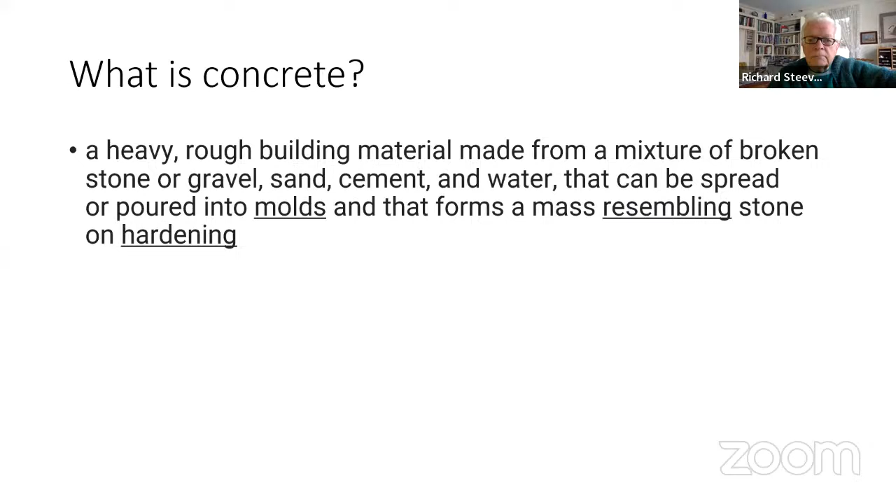So compared to concrete, cement is the binder. It's the chemical substance used for construction that sets, hardens, and adheres to other materials to bind them together. It is sort of a glue. And I know for myself, I always in the past used them synonymously, and they're really not. The aggregate that goes into concrete can be pea gravel, or it could be stones or broken up material. So let's differentiate between cement and concrete, and I think you'll see why here in a little bit.

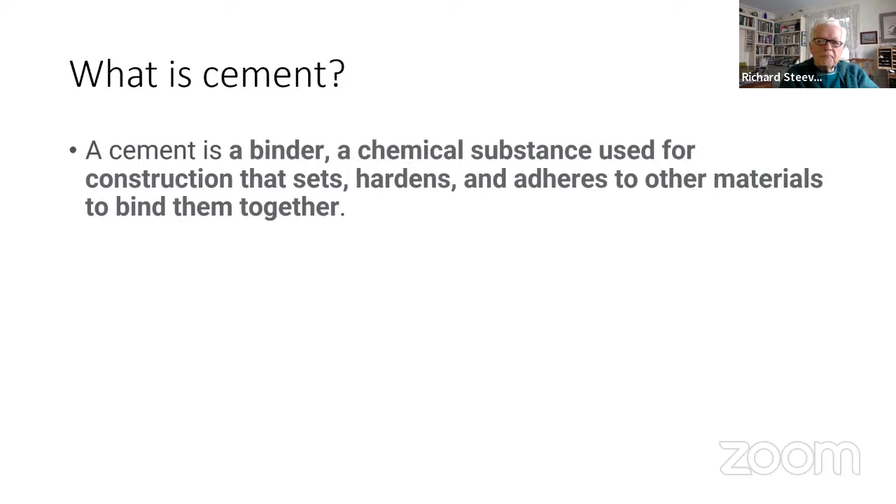So this is, hold on a second. So this is the chemistry behind cement and concrete, and this is in part what Richard's getting to, that to make cement, and in particular Portland cement, you take limestone, which is calcium carbonate, CaCO3, and you heat it up in a kiln. It drives off the CO2, the carbon dioxide, and leaves you with lime, which is simply calcium oxide.

And then you combine that lime with silicon dioxide, which is sand, and you get several different varieties of this calcium silicate, or calcium oxide silicate compound. And it turns out that the three-member version of that develops most of the strength in cement and concrete itself. There's also alumina, that third one down, this one right here.

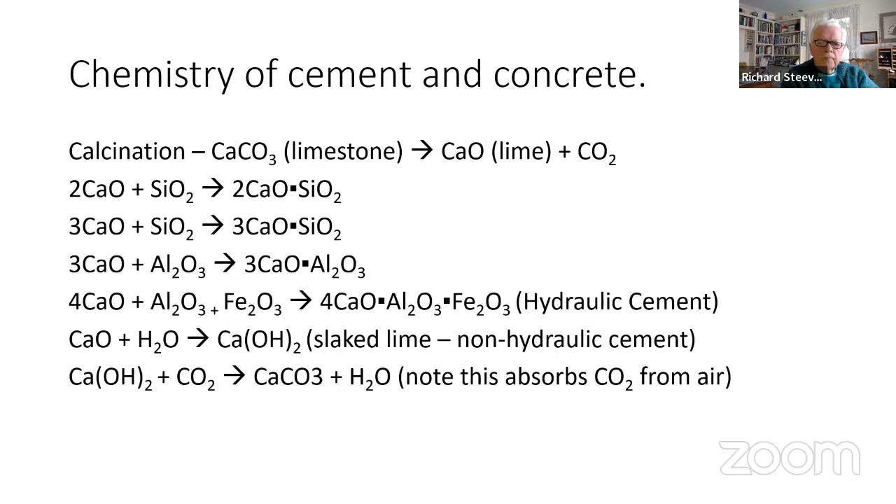Quick question, if I could, Doug. Does Portland cement include mixtures of the top three in your previous slide? Or does it also include slaked lime? Yeah, so I'm going to get into that right here. That's a great question. Okay. Good.

So it turns out, and you can see it here, this is Portland cement composition. And you see in the mass concentrations that they vary quite a bit as to how much of each of these components end up comprising the ultimate cement that you use. And I'll get into this in more detail a little bit later, but this variation is a result of a long period of time in the development of cement itself and how to concoct different recipes that end up with different properties.

So the cement, for example, that's used in a nuclear reactor shell would be different than the cement that you would use to pour a sidewalk. The requirements, probably the testing as well, of the two are quite different. And yet again different is something that you would line a chimney with. To line a chimney, you put a lot of alumina in there. You end up with a Portland cement that is very resistant to temperature, but it's prone to sulfur attack, for example.

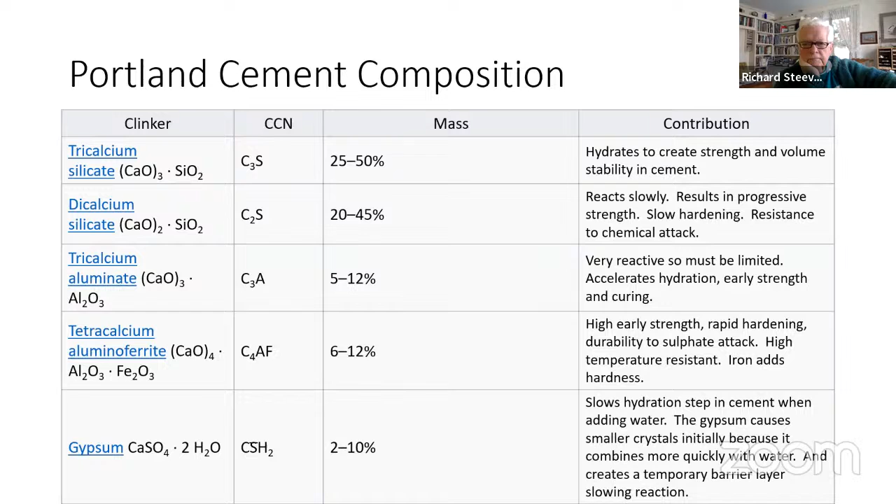And obviously that's an important consideration, depending again on what you're building. So again, here's a typical concentration profile of Portland cement.

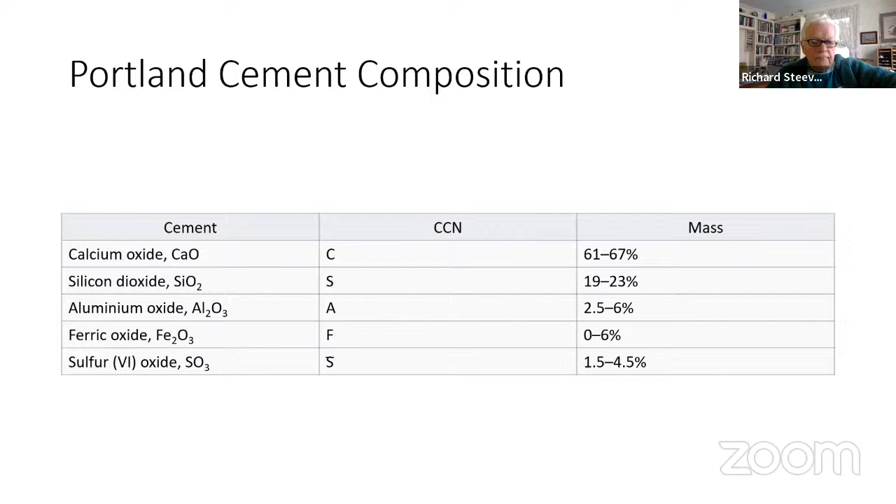And I'm gonna go through this in a little bit of detail because I personally found it interesting. So this is the chemistry that occurs when you add water to cement. This tricalcium aluminate first reacts with the gypsum. Remember, the gypsum has sulfate in it. I think everybody knows that gypsum is what you make wallboard out of, or sheetrock. It's in sheetrock.

With this water, it produces this compound that's called ettringite, and it also releases quite a bit of heat. It's this formation of ettringite that slows down the ultimate reactions that result in the hardening of the cement and the reaction with the aggregate that's in the concrete. The ettringite consists of long crystals that are really only stable in a solution with gypsum. So it's not stable without the gypsum, and it ultimately doesn't contribute to any of the strength in the cement glue. But it's important to slow things down initially.

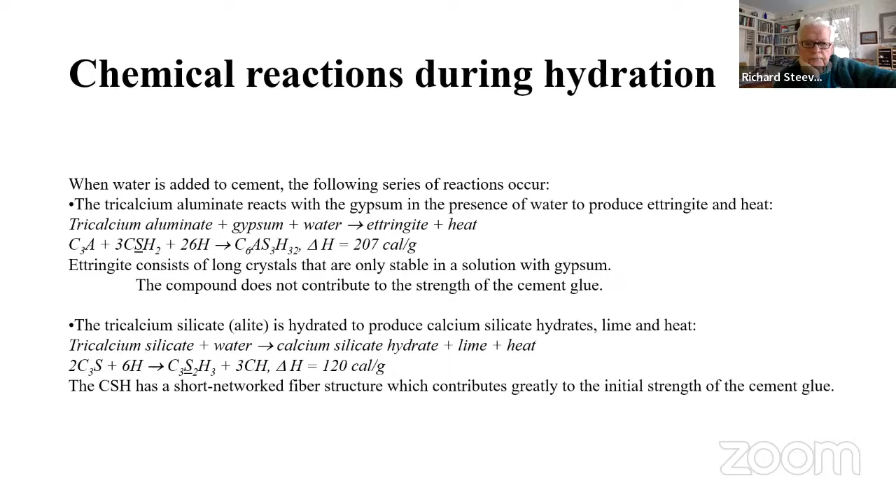Once all the gypsum is used up, the ettringite that was formed becomes unstable, and it reacts with any remaining tricalcium aluminate to form this monosulfate. Because this is unstable, it can create voids in the cement and in the concrete. Those voids then allow water to come in and a different crystal structure to appear and to grow. And these bigger crystals can result in cracking of the concrete.

It's sort of interesting. I'm not a civil engineer by training, but one of my brothers was a civil engineer, and I remember him telling me once that all concrete cracks eventually. If you've ever had a concrete driveway or concrete in your garage or on your basement floor, you're always disappointed when you start seeing cracks. You think they didn't pour it right. But this exposure to water and this change in crystal structure can result in these cracks. And that obviously weakens the concrete.

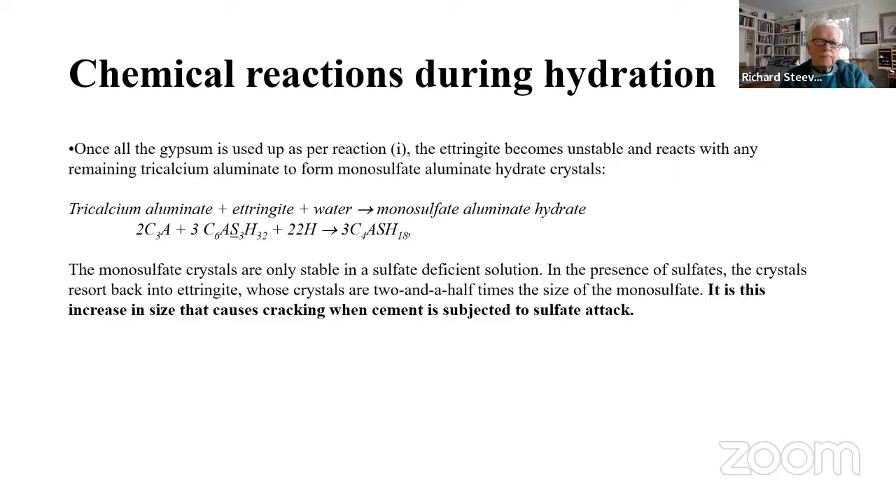And we'll get into this a little bit, it'll expose any structural steel embedded in that concrete to the elements, which can result in corrosion and weakening of a structure. So clearly when you're using this to build tall buildings, you have to be sensitive to that. Especially if you're in Turkey. Especially, really anywhere in the world, yes, including here in the US, right? Sure.

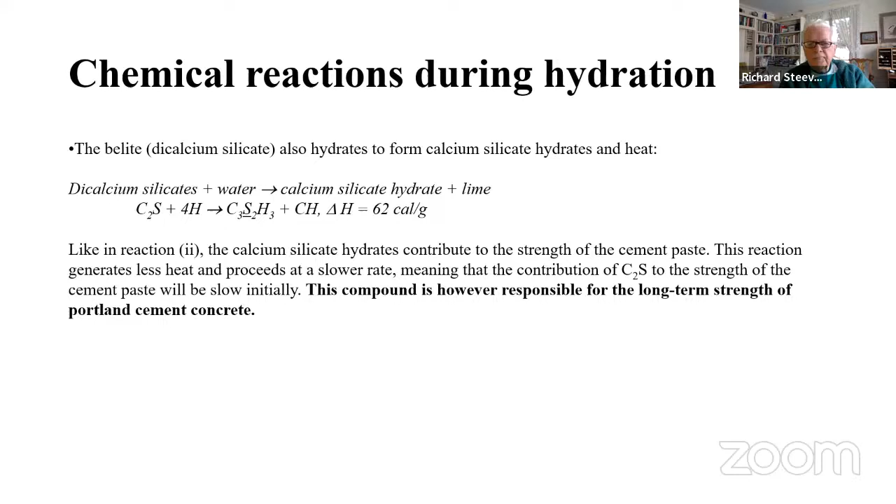So this dicalcium silicate also hydrates to form a calcium silicate hydrate and more heat. And it contributes to the strength of the cement paste. It's interesting, I copied this out of documents online, and cement is always called a paste. I've never thought about it in those terms before, but that's one of the things I learned from this dive into concrete. This reaction proceeds at a slower rate, so it develops its strength more slowly, but the compound is responsible for long-term strength of the Portland cement concrete, by slowly curing over time.

Could I ask a question? Sure. Concrete, as I understand it, is very strong under compressive stress and very weak under tensile stress. Correct. Is that also involved in the choice of cement? I think, Don, I'll say that no cement is terribly strong in tensile stress, and to gain that additional strength, that's what you add the structural steel for, and it's also important that it be able to undergo some torsion, right?

Either twisting or bending, and buildings that have concrete in them do sway back and forth to some extent, so there are a lot of other compounds added to cement, including polymers, to improve the ability of the concrete to flex more, in spite of the fact that it doesn't like doing that. Again, I'm not an expert in all this. I know a lot more than I used to, but I've read a little bit about that as well, and you're right. Generally speaking, concrete is used to support things as opposed to hang things.

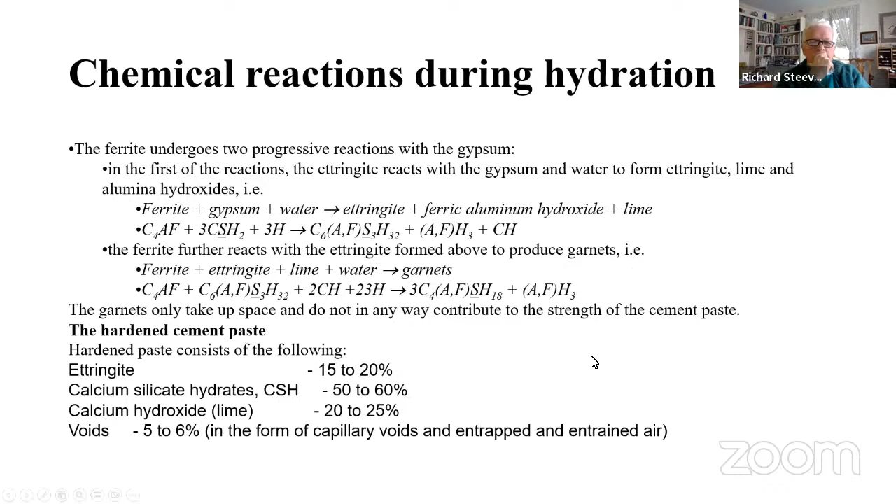Having said all this about the sort of underlying chemistry, this is really why concrete is desirable as a construction material. So concrete has a lot of properties that make it popular. And it's this correct proportion of ingredients, placement, and curing that are needed for the properties to be optimal.

Good quality concrete has many advantages. First, it's economical when the ingredients are readily available. Concrete's long life and relatively low maintenance requirements increase its economic benefits. Concrete's not as likely to rot, corrode, or decay as other building materials. It can do all of those things, but it's just better than some other building materials.

It has the ability to be molded or cast into almost any desired shape. I think that's something that after reading it, I have real appreciation for. And the building of the molds and casting can occur on the work site, which reduces costs. Obviously, you don't have to transport these things. Although we've seen certainly that in some cases, these precast concrete shapes are brought to the site. So there's obviously a trade-off there at times.

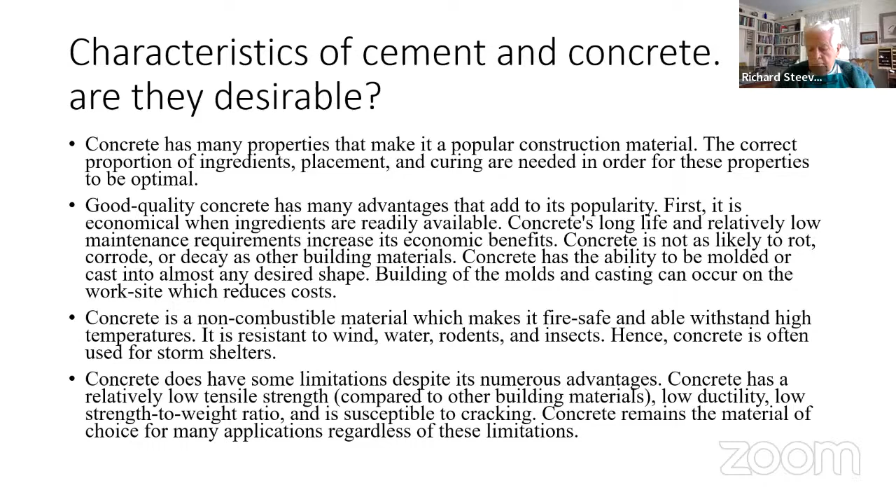So what's the impact? Well, before I go on to this, I just want to point out that one of the things that I learned about concrete is that as long as it's been around and as much as it's been studied, it really isn't as well understood as you would expect. And it turns out that the specification for concrete is not so much based on its ultimate properties, but it's based on a formulation.

So, for example, it's my understanding that if you were to actually specify concrete for, for example, a nuclear power plant shell, the specification for it is in terms of the components, the recipe for the concrete, and not necessarily a physical test that determines that the recipe resulted in the proper physical properties. And that's because it's so complicated.

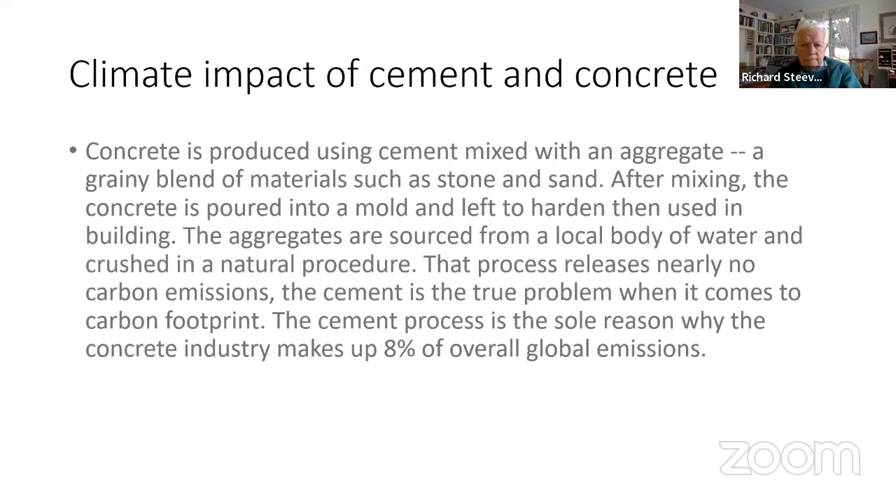And that process of producing the aggregate releases really almost no carbon emissions. Sure, there's probably some energy used in doing that, but for the most part, the cement itself is the true problem when it comes to carbon footprint. And the process of producing this Portland cement is for the most part the sole reason why the concrete industry makes up about 8% of overall global emissions of CO2. So this is a distribution of those emissions, and you can see here the concrete sits in this little piece of pie right here.

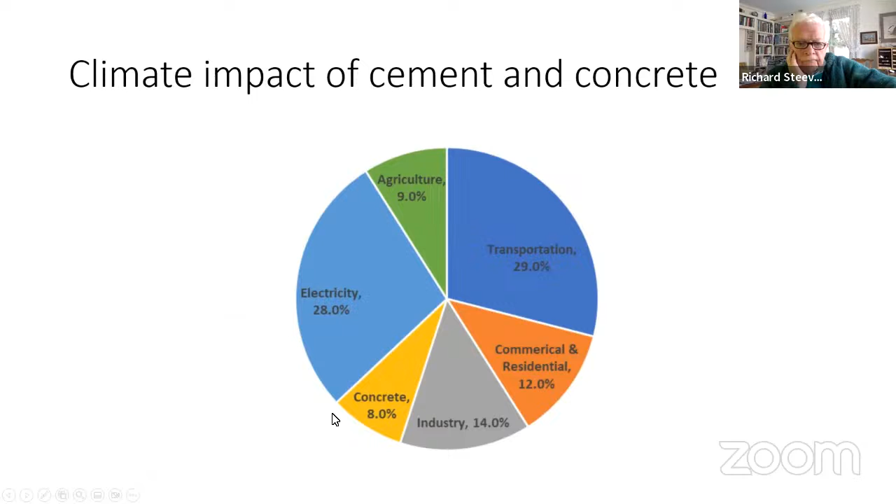So this talk is supposed to be about alternatives to cement, but I needed to learn about cement to begin with. And so I dragged you through that too. After all, I had to be dragged through it. It's only fair. Sure.

So there are alternative binders to Portland cement, and some of them are listed here. We're going to go through them in more detail here in a minute. One of the things that is added to cement often is fly ash. And we're going to talk about fly ash quite a bit here.

But fly ash is something, when you're burning coal, other than the carbon that's in the coal, there's a lot of other mineral material in that coal, and it ends up coming out the top of the stack or being precipitated out as fly ash. And there is an enormous amount of fly ash that makes up lagoons and just fields of it around the U.S. and really around the world.

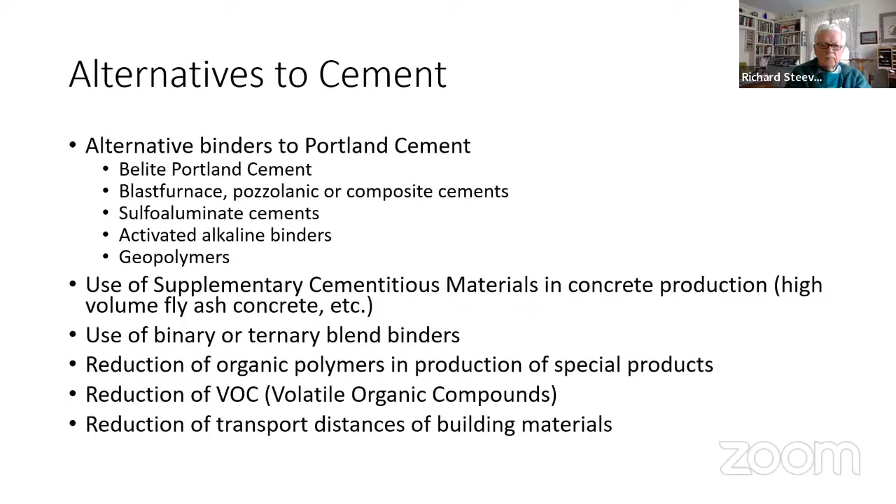Those are additional components in this cement that to some extent replace the Portland cement that we use in larger amounts. It turns out that cement's been used forever. And so I found this online that the Babylonians and Assyrians used asphalt to bind together burnt brick or alabaster slabs.

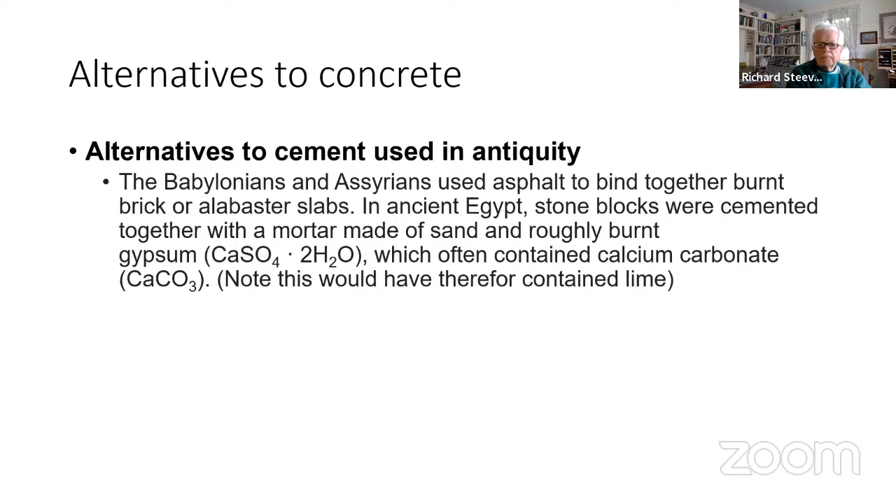And then in ancient Egypt, stone blocks were cemented together with a mortar made of sand and roughly burnt gypsum, which often contained calcium carbonate. And therefore, this would have contained lime. And this is actually a type of mortar that we sometimes use even today, to build a brick wall or a stone wall in particular, just to fill in the gaps between stones.

So sulfo-aluminate cements: you burn limestone, calcium carbonate, bauxite, which is what contains the aluminum, and gypsum at roughly 1300 degrees centigrade, and you get this 20 to 70% of tetracalcium trialuminate sulfate, and you use less limestone when you do this, and because of that, you produce a little bit less carbon dioxide.

You use more gypsum, which is that calcium sulfate, and you end up with something that is a little bit more porous. And when you produce this stuff in a kiln, you can imagine you're melting everything, and then it's sort of solidifying as you cool it.

And then to use it in producing concrete, it's necessary then to grind it. And so this material, I guess before it's ground, it's generally referred to as clinker. And so that clinker is then ground to a finer powder, and that's what typically we would buy in a bag, say at Menards or at Home Depot or a hardware store.

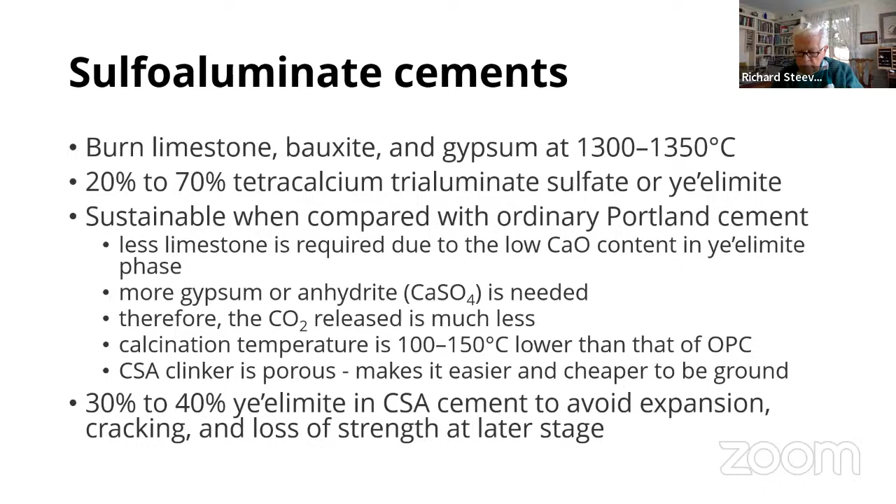One of the things that I had to get used to when I was reading articles on this was that the C normally refers to calcium as opposed to carbon, and because these are all hydrated crystal structures, you can imagine that the chemical formulas are really long, because there's a lot of water that goes into this crystal structure. And so what they do is to shorten everything to single letters, and so you have to get used to the abbreviations.

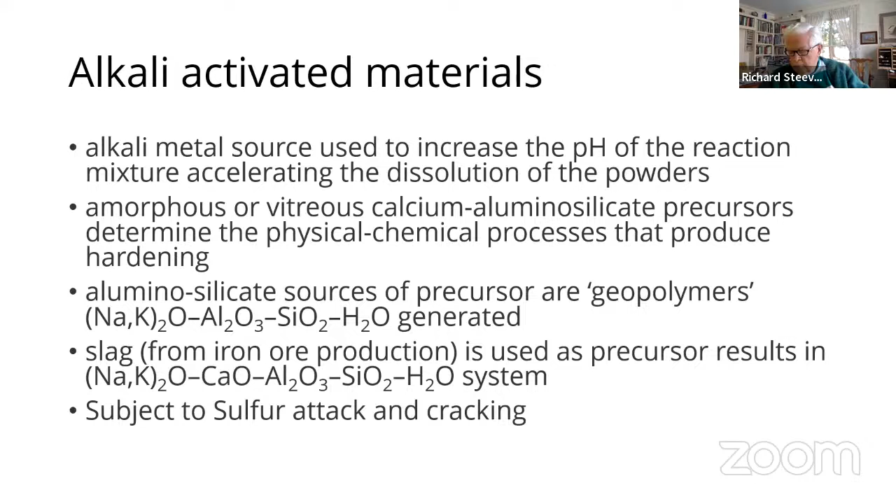And then in addition to fly ash, iron ore slag or iron slag from production of steel can be used. And likewise, silica fines can be used in this system. So all of these can be subject to sulfur attack. And the sulfur attack occurs when, remember that we have that gypsum in there that has sulfate in it. And if you get sulfur into the voids in the concrete or in the cement, then the crystal structure changes and those crystals get bigger, and that causes the cracking. So again, this formulation tries to avoid the voids from forming and prevent this conversion of these crystals to larger crystal structure.

The geopolymers are attractive because the natural and industrial silico-aluminate waste can be used as precursors. That's fly ash. That's slag from iron or from steel manufacturing. And the sediments in the reservoirs also contain a lot of alumina and silica, obviously. So these sediments are forming upstream of dams along rivers certainly in the U.S., but really around the world. You can imagine that the reservoir formed by this big dam in China is going to slowly but surely fill up with sediment, and it'll have to be dredged out. These materials are available from those sources.

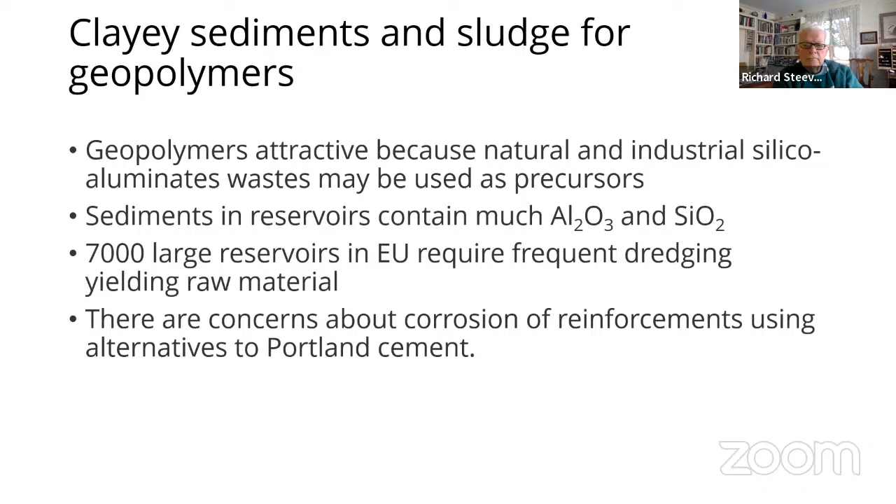And so again, this issue with these voids being created in the cement is a concern because they allow water to infiltrate concrete, and then that attacks the structural steel that is oftentimes included in the concrete itself.

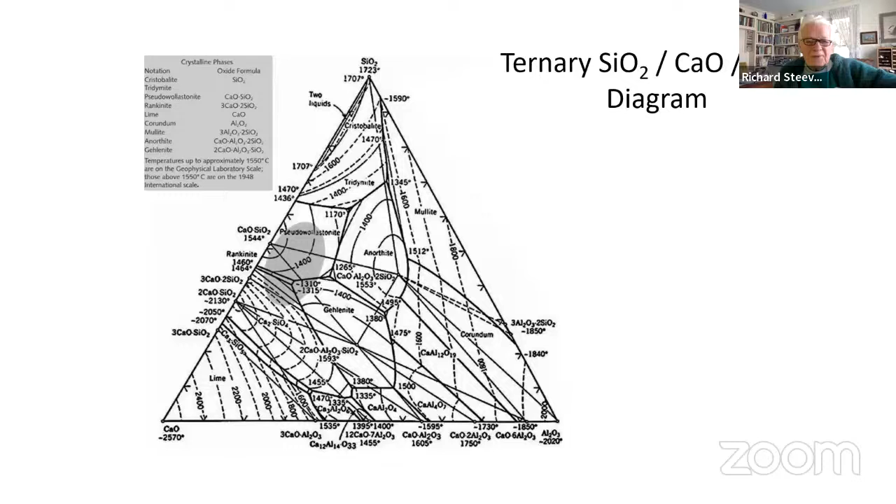So, what are some of the alternatives to this? That's really what this talk was supposed to be about. I'm going to go through a list of them here; I found a whole bunch of these things. So bamboo, as you see here in this picture, can be used as an alternative to putting in structural steel, for example. Bamboo, obviously, being pretty flexible. It's available locally in some parts of the world. And it's apparently becoming quite popular to reinforce concrete. Doesn't affect the cement at all, however.

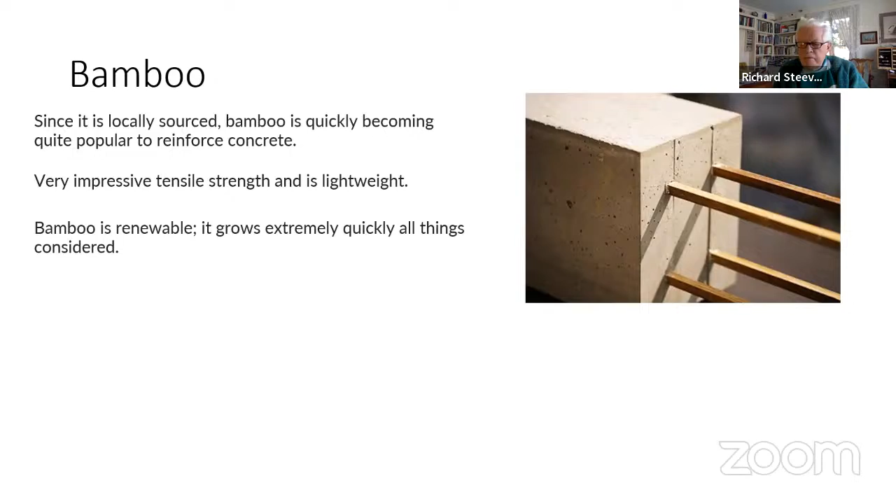It has impressive tensile strength, and it's lightweight, which can be valuable because it means you need less strength down below to support what's above it. You can imagine you're building a tall building, you're putting quite a bit of concrete up high in the air, and you want that to be as light as possible. Using bamboo could accomplish that. And anybody who's ever had bamboo growing in their yard knows it grows fast, and it spreads fast too. Obviously, steel is used, so one of its advantages is that when you break up old concrete, you can reuse that steel.

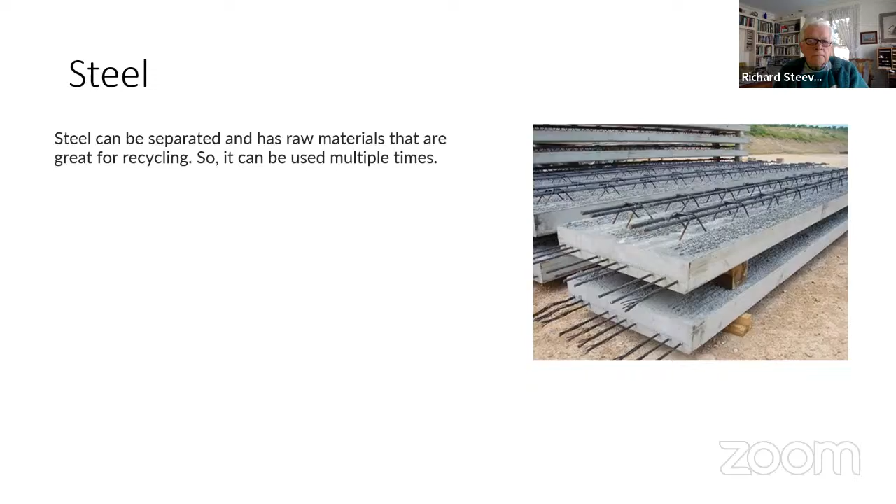Wood. So actually, as a complete replacement to concrete in particular, we can use wood, and a couple of the interesting aspects of it are that when we're growing trees, we are sequestering carbon, but likewise, if you take a tree and you put it into a building like this, you've sequestered that carbon for a long time. So there's been a lot of discussion about the replacement in buildings, in particular building with wood structure.

If you look at buildings today, they're using, I think generally, steel 2x4s in the walls, and actually using wood is a better idea from the perspective of sequestering carbon, because you put it in there and it's going to be there for 100 years or more. And likewise, it also, generally speaking, has a high strength to weight ratio.

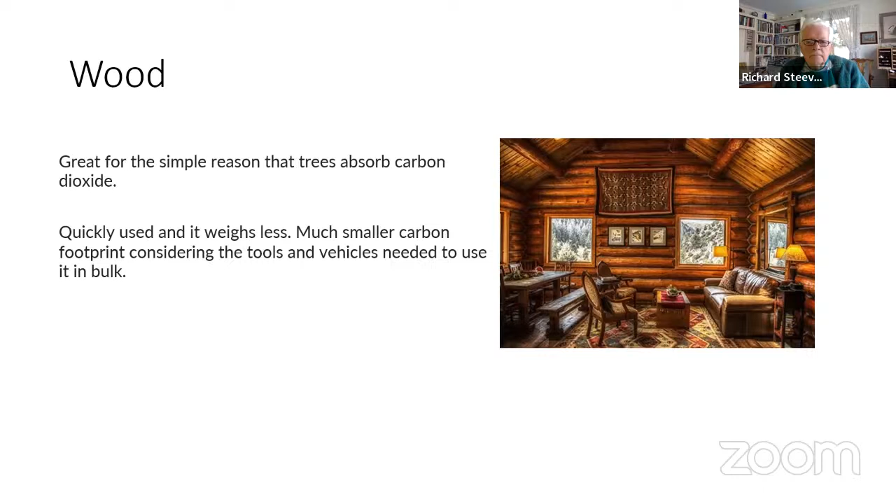This was interesting to me, the use of straw bales to build. It says, when houses were made only from natural and locally available materials, straw bale buildings were quite popular. They're used for walls inside a frame and replace materials like concrete, wood, and gypsum. They would provide a lot of insulation from any kind of climate, affordable and sustainable, because they're renewable.

And apparently, I haven't seen any of these in Madison, but lots of tiny houses and eco-friendly homes are being made using straw bales. Many are going off-grid and building hobbit homes. It's kind of an interesting concept. And then using it with concrete is a matter of stirring it in. So clearly you could.

Sorry, say that again. Was that a mistake?

So, clearly you could mix cement in with the straw and use it as a sort of a structural enhancement as well.

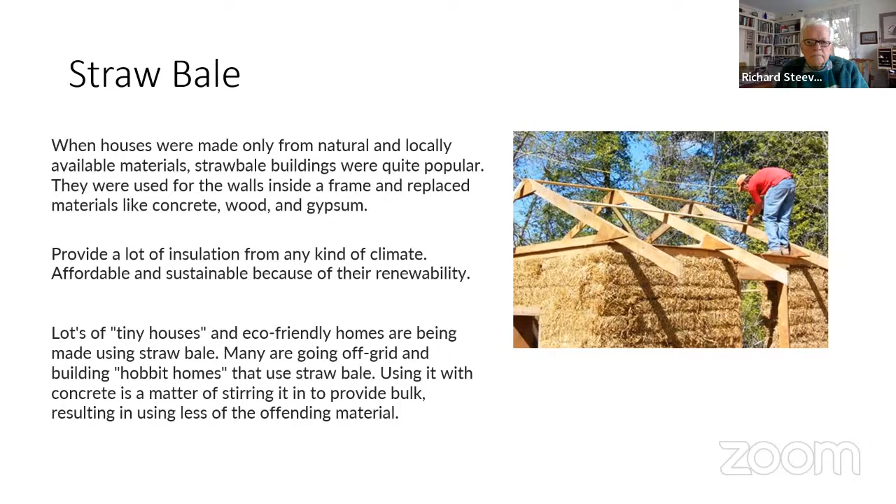Isn't this an upgrade of adobe construction? I think you're right, Don. I think it would be similar to that, because certainly I think adobe does mix grass in with the mud, right? Yes, I think that's right. Yeah.

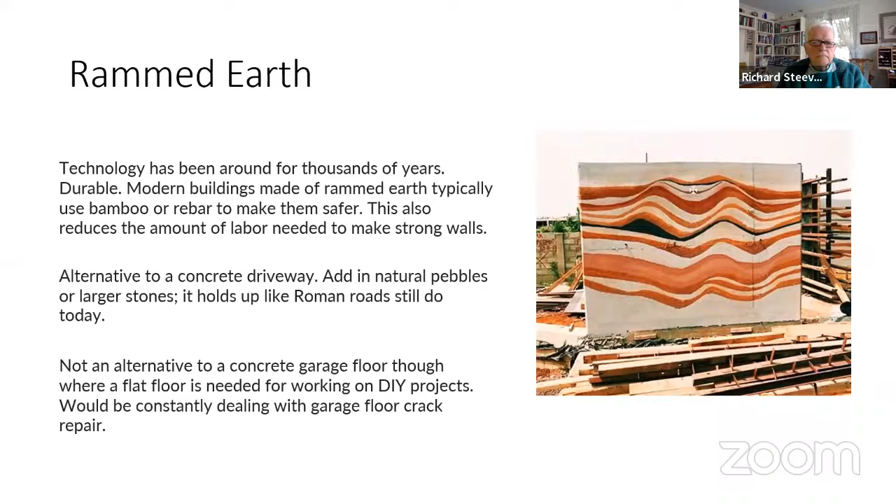And then grasscrete. So I don't know if any of you have seen any of these, but I know in our neighborhood here, I've seen a driveway that's actually been created like this, where these blocks are arranged in a pattern like this, and then grass actually grows in between in what would typically be a mortar. In this case, it's probably more like some type of dirt that packs in between, and then the grass grows in between and sort of cements everything in place.

And it's sort of pleasing to the eye, and it helps to drain the surface, which has a very significant benefit really around our Four Lakes area, because we don't have as much water then draining into the lakes, and helps to drain your property as well. And clearly this would reduce the overall amount of cement that you would use.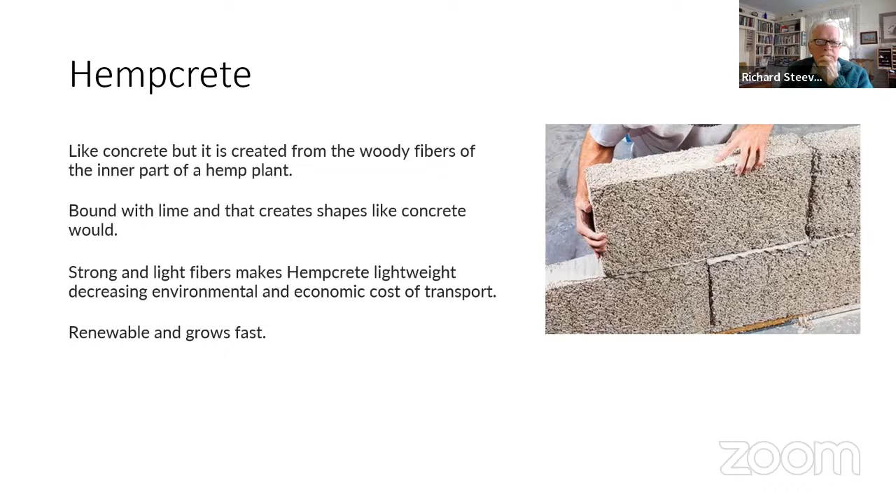So here's ashcrete. So you use fly ash in making the cement, and I think that you can use a variable amount of fly ash when you're producing cement. Based on something that someone said to me, I haven't verified this independently, but my understanding is that Portland cement in the state of Wisconsin requires a minimum amount of fly ash, and that's because its composition includes a fair amount of a particular type of silica, and it's only certain fly ash that can be used in making this Portland cement.

I mentioned that fly ash in general, to be used in the process that produces Portland cement, needs to be amorphous. And fly ash that's been exposed to a lot of water and has then been allowed to settle over long periods of time can crystallize, or the silicate in that fly ash can crystallize, and that makes it unusable in that process.

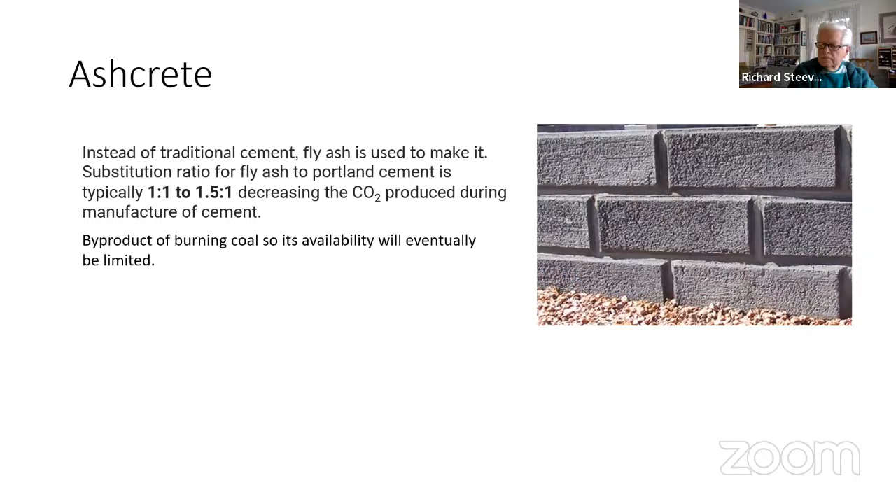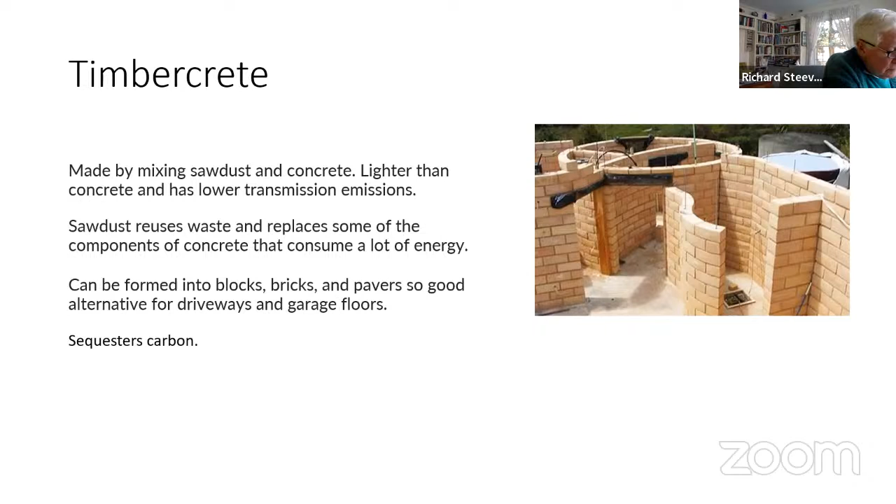Then another alternative is using sawdust in the mix instead of bamboo or straw bales or whatever else. Waste paper, another alternative. You can cut up or mix up all this paper and then mix it in with the cement.

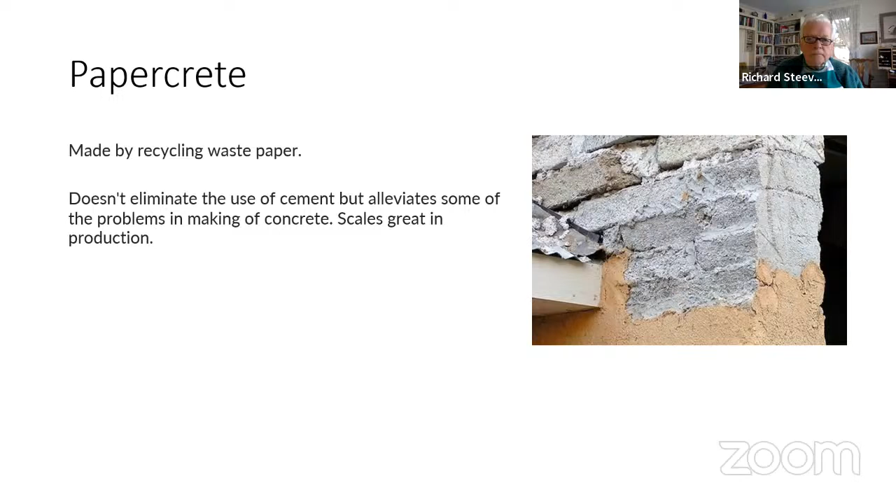So here's a material that can be grown into bricks. So the root structure of fungi or mushrooms, and then it's grown in molds, and it actually forms around other natural materials like straw, and you can form bricks from it, and then air dry them and use them as bricks and cement them together, right?

That's cool. So very lightweight, renewable, and other than the mortar that you would use, would completely eliminate the production of CO2. In fact, the formation of the brick itself would undoubtedly consume CO2.

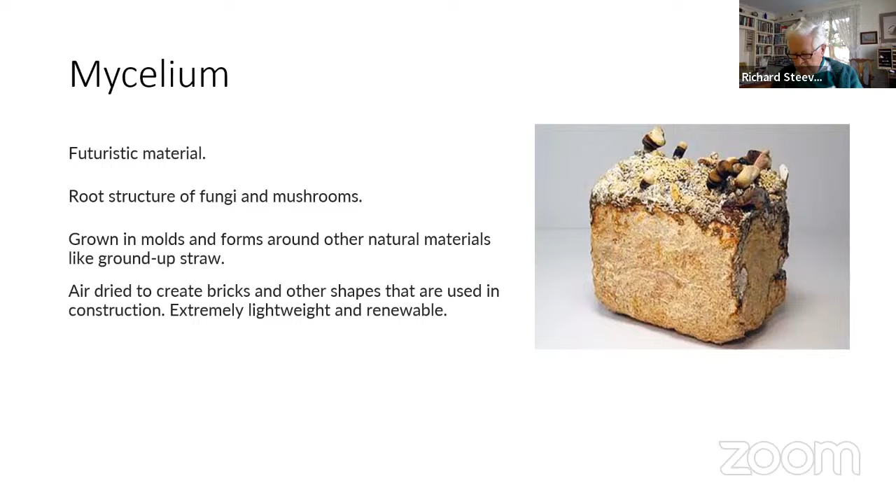Then what's called ferrock, which is where you're recycling materials like steel dust, and you're mixing that in with this Portland cement. You're making it part of this Portland cement, and this process absorbs carbon dioxide during drying and hardening.

You know, this is something that I think Richard, you were wondering about earlier. So it actually absorbs more CO2 than it creates, because it's forming a carbonate as it's hardening. It's great. And it says here that about 95% of ferrock is made from recycled materials such as waste steel dust coming out of steel mills and silica from ground up glass.

So apparently there is a fair amount of this silica dust that, I don't know if it comes from the recycling of glass or it comes from glass manufacturing facilities, but it apparently is available. I know I'm going to bring this up here in a little bit. Again, somebody has mentioned this to me.

And Doug, do you know if Bill Gates favored one over the other? I can recall in reading his book and reviewing it, he talked about other substitutes, but he wasn't very specific. Do you happen to know if he favored any of these? I don't. I didn't read anything that he's written. Okay, I will look into it. Well, I'm going to get into what I personally favor here in a bit, and I may very well make him aware of it.

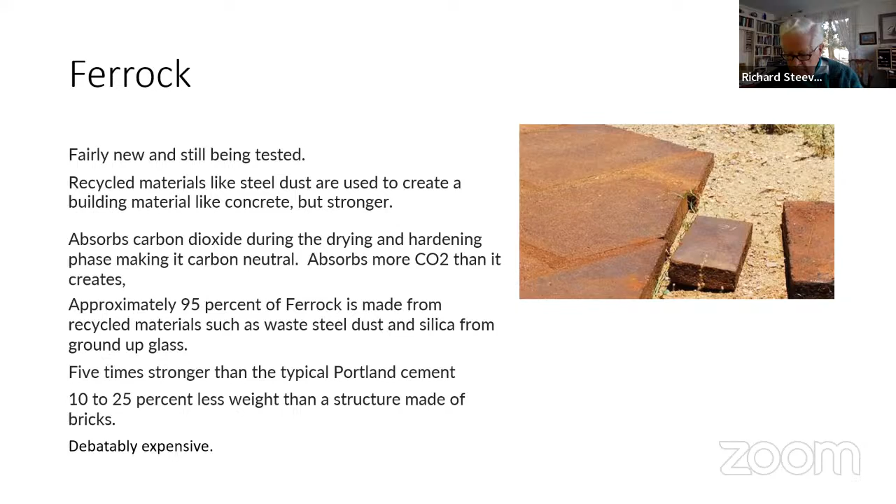So anyway, this particular alternative is quite a bit stronger because it has this steel dust, and it ends up being much stronger than typical Portland cement. But apparently, it can also be expensive. Yeah, Bill said that. And expense is a big issue, and I'm going to get into that here in just a bit.

So blast furnace slag can also be used. You get the slag out of a blast furnace, and you then grind it up and use it instead of cement, or as part of the cement. Okay, so it ends up improving the durability of the concrete, and it does that again, I suspect, by eliminating some of these voids and pores that end up in cement and in concrete.

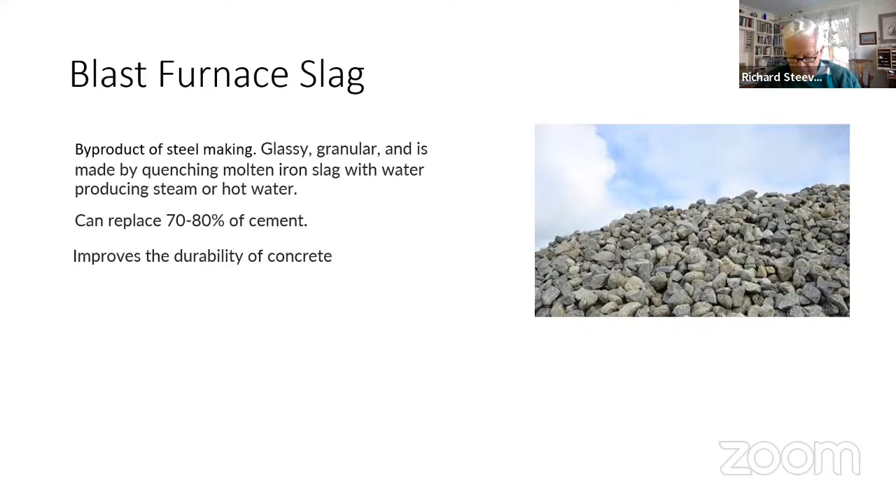Microsilica, I mentioned this earlier, that you end up with very fine silica, which likewise can be used in producing cement.

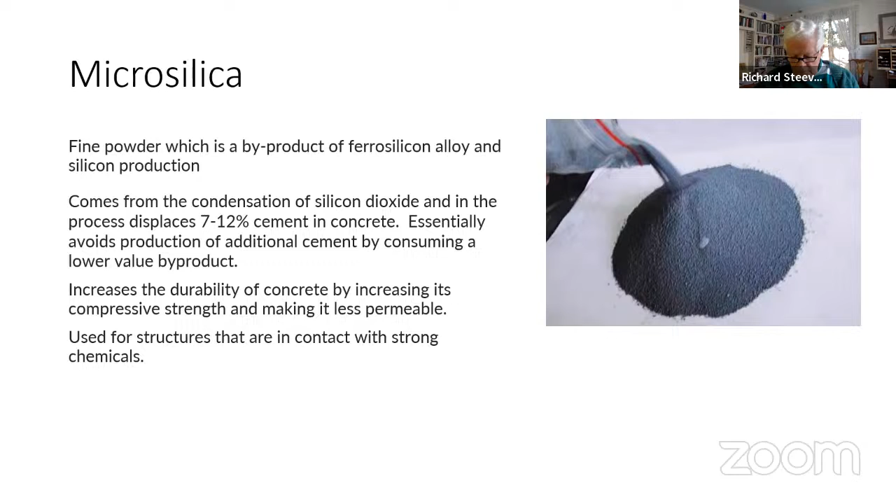To be honest with you, I don't know what the actual economics of deconstructing versus putting material into a landfill is. I don't know what the economic trade-off is right now. Ultimately, we would have to do this because there won't be any room for landfills anymore. So in any case, nowadays, I certainly see a lot of this happening.

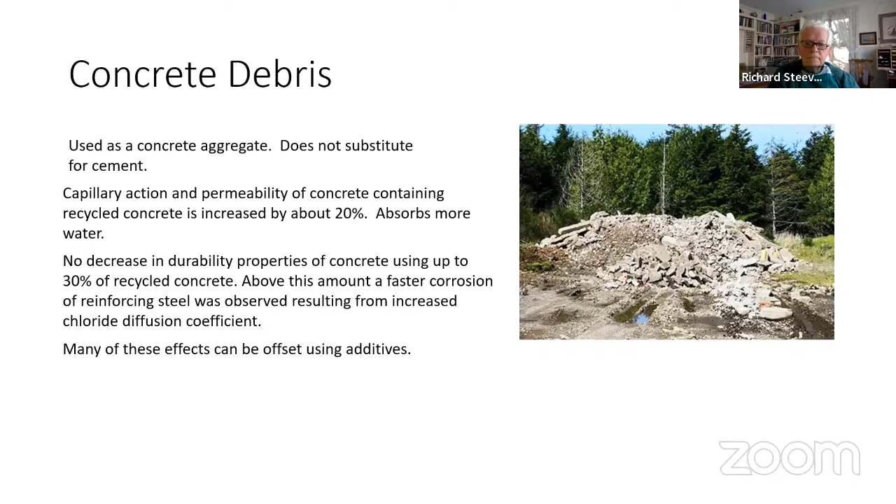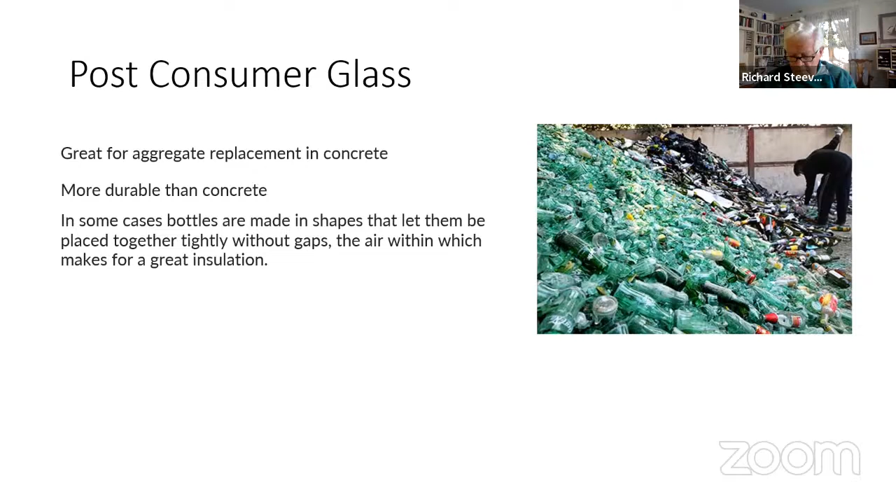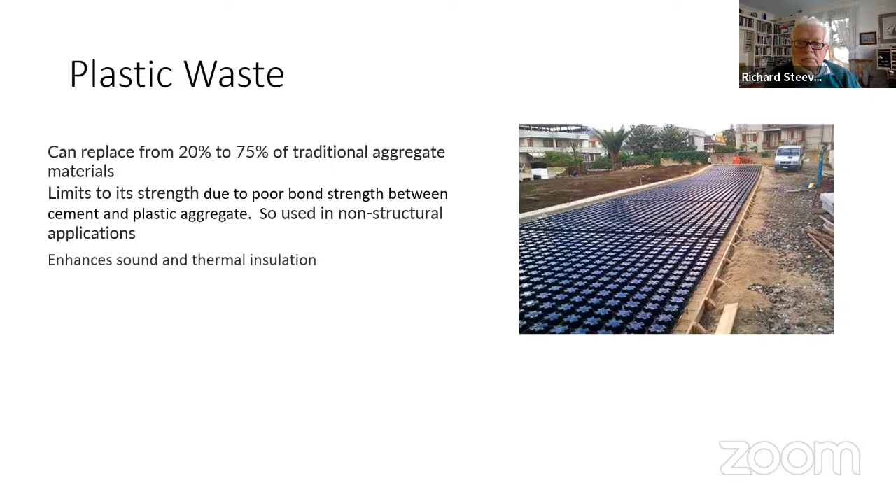And because of that, you can create this large void in the middle of the structure that can't be penetrated and won't change shape, therefore won't result in cracking, and you'll end up with the same strength but a much lighter, actually presumably less expensive alternative to using a whole bunch of concrete. And I'll give you another example of that here in just a second.

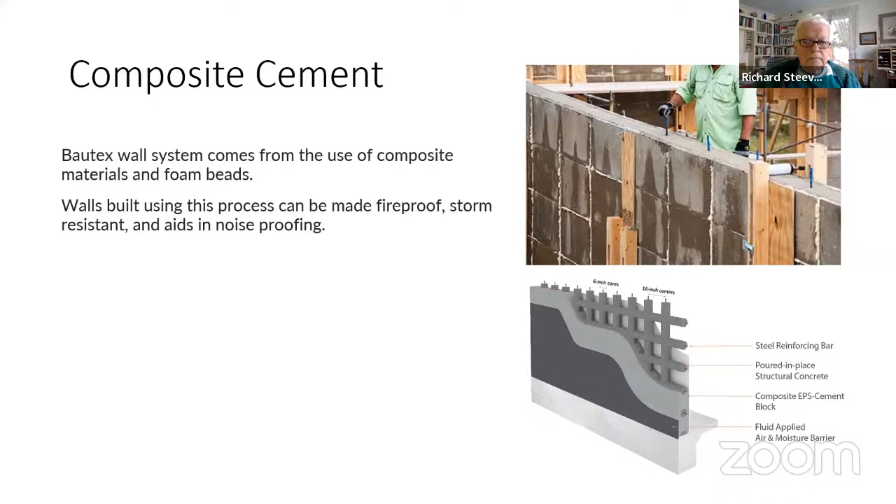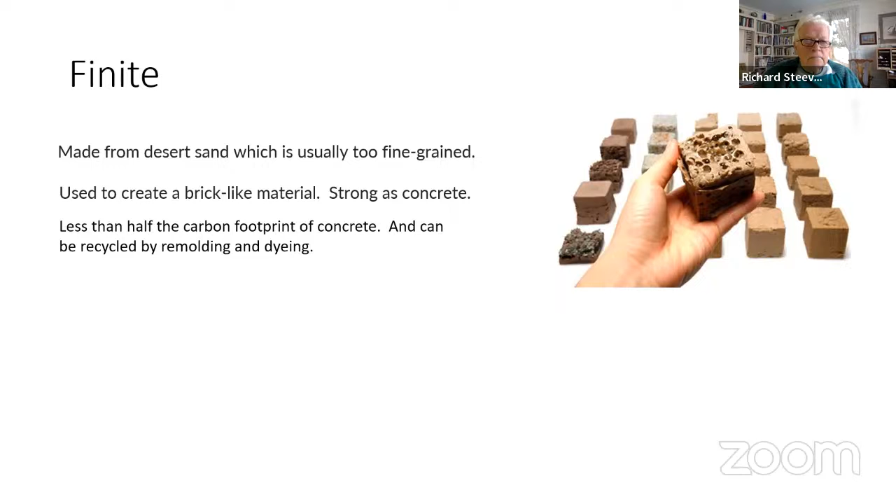And you're using a lot less concrete, and you're lightweighting that floor. So again, you don't have to have as much structural steel and structural material holding that floor up from below, because it's much lighter. And this process was used by Findorff, actually, when they built the LaBahn Center. I think this process was developed in Europe, and Findorff became qualified to use it here in the U.S., and they experimented with it when they built the LaBahn Center.

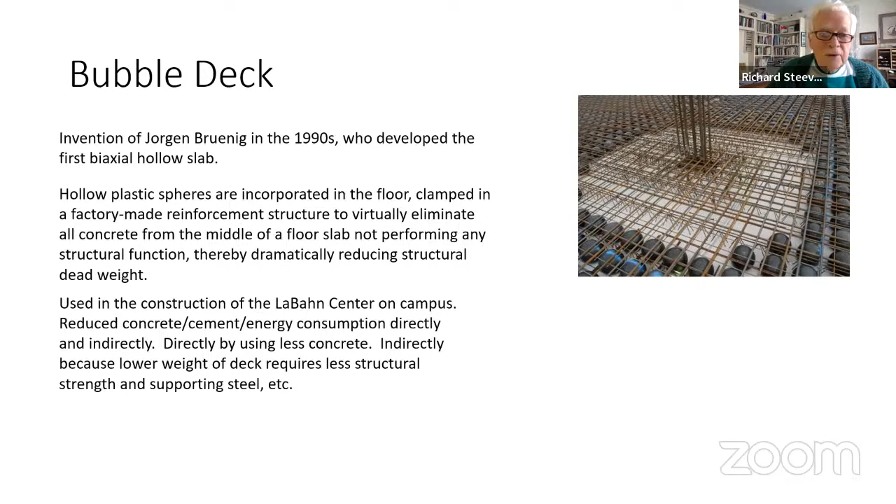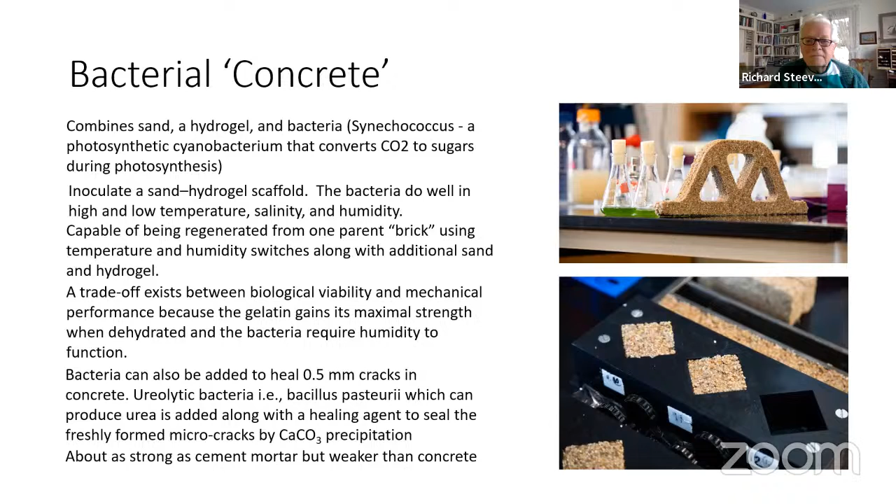Okay, so what I'm going to get into now is what I would describe as a serendipitous revelation to me. In addition to a lot of other things that I do, and attending this class is one of them, I attend a seminar series at the Energy Institute, and many of you may do that as well from time to time. I try to catch all of them. And probably a month and a half ago, it just turned out I was obligated to do this talk, and there was going to be a talk given on an alternative to cement that would capture and sequester carbon dioxide. And naturally I was very interested in this, so I attended the lecture.

And this process is being developed here at the University of Wisconsin by a guy from, I think, the biological engineering group. I know that he has an office at the Energy Institute. Another guy is a civil engineer, and I know that they are also working with somebody from political policy making, as well as another colleague from Penn State who is a concrete expert. So it's a collaboration among a number of different disciplines.

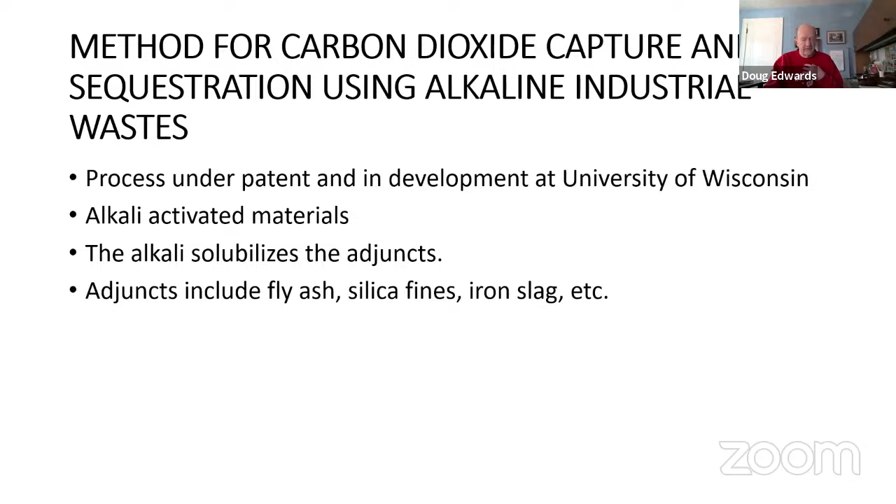Well, it turns out that they actually prefer not to get the CO2 from that. They'd actually prefer to get it from ambient air. And that actually allows them to make these plants much smaller. So much like in the nuclear industry, smaller plants have some advantage, because once you produce cement, concrete, you have to transport it to the job site. You don't want to have to transport it halfway across the country. So having smaller plants closer to where the product is going to be used is an advantage. And being able to capture CO2 from ambient air is also an advantage. You can place these plants in lots of different places.

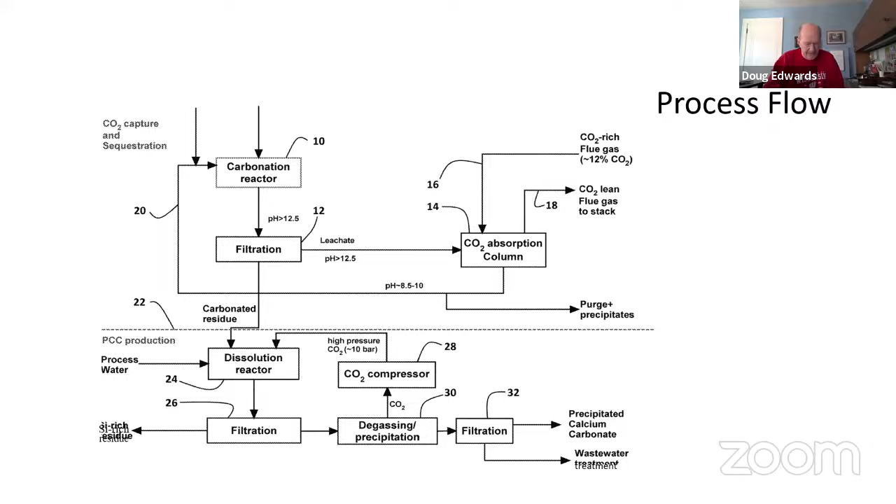Okay, so you would be essentially removing that from the input stream, and then in addition to that, absorbing, I think it's another. Well, actually, I have the numbers here. Let's see. So here's what the potential impact of this process might be. So first of all, no CO2 produced. Portland cement produces around 0.9 pounds of CO2 per pound of cement. And the annual worldwide production of Portland cement is about 4.1 billion metric tons or gigatons per year.

Therefore, you could potentially decrease annual CO2 emissions by about 3.6 billion metric tons of CO2 per year. Then the CO2 consumed and embedded or sequestered in the cement is about 15% of the final product. And if you assume product substitution 1-to-1, the CO2 captured and sequestered annually would be about 0.6 billion metric tons. So the total would be around 4.2 billion metric tons annually.

Okay. Doug, this is extraordinary and exciting. And what's the time scale for this effect?

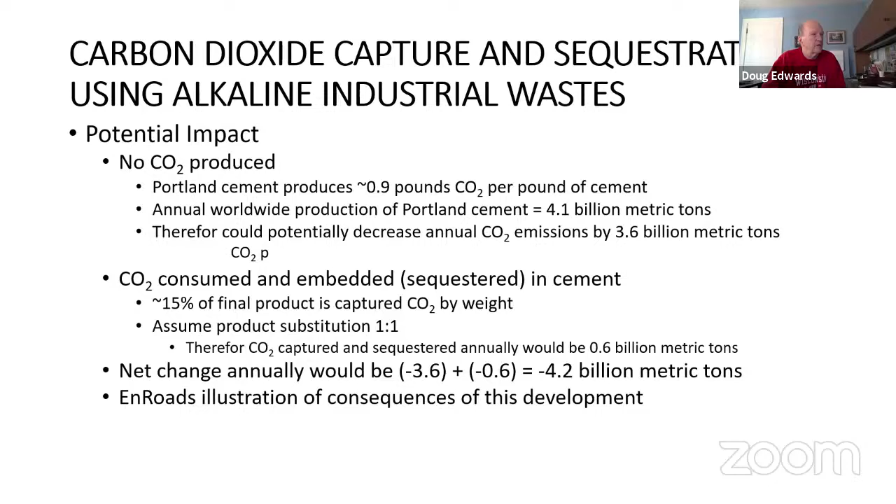It's interesting. In the discussions that I've had with one of the people who is developing this, there are lots of business aspects of this. So let me see if I have more information here. Hold on. Okay, I'm going to show you something else here in a second. But these are elements that enter into really that development timeline, Don.

So right now, Portland cement costs about $85 a ton. And my understanding, again, based on this conversation, is that with no subsidy whatsoever, this alternative right now costs $220 a ton. And clearly that's an issue. Because if you want something to happen quickly, I know from my experience and my training, you need product advantage, that is property advantage, and you need economic advantage, price or cost advantage. And so this is a me-too product, and it has a cost disadvantage at the moment, just looking at that number.

In spite of that, first of all, the recent Inflation Reduction Act actually creates a subsidy for this type of material of about $30 a ton. Okay, and clearly that's not enough to make it competitive on an economic level with Portland cement. However, I have also mentioned to you that fly ash comes in sort of two flavors. One is buried underwater. It's wet. It could very well be crystalline, and the other version is dried out, relatively new, having been produced more recently from a power plant. And that second version is what is used in Portland cement manufacture nowadays. But both flavors actually can be used by this process.

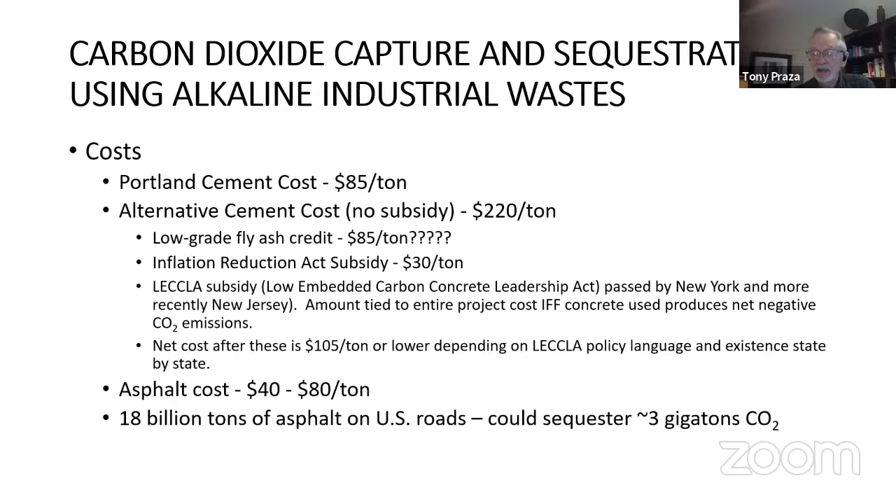Doug, this is Tony. If you need that, we only have a few more minutes. You might want to move on to the next couple slides that you have. So, okay. It's a good discussion, that's for sure.

Yeah. So the last thing that I really wanted to get into, I actually could do something else in addition to this, but here are the benefits. If we implement carbon pricing, if we electrify, if we plant trees, and we substitute alternative cement, this thing that we're talking about right now, I've put this into En-ROADS, and I made a presentation to this group some time ago using En-ROADS, and I actually could do it today as well,

where I've tried to model this change in En-ROADS. But I end up with a limit to year 2100 temperature rise to about 1.7 to 1.8 degrees Fahrenheit in En-ROADS. En-ROADS is a simulation model that gives you an idea as to where you're headed. So this by itself won't accomplish the full reduction down to 1.5 degrees. But I will tell you that in playing around with En-ROADS in the past, I've had to do all manner of things in order to get the temperature rise down to roughly this level.

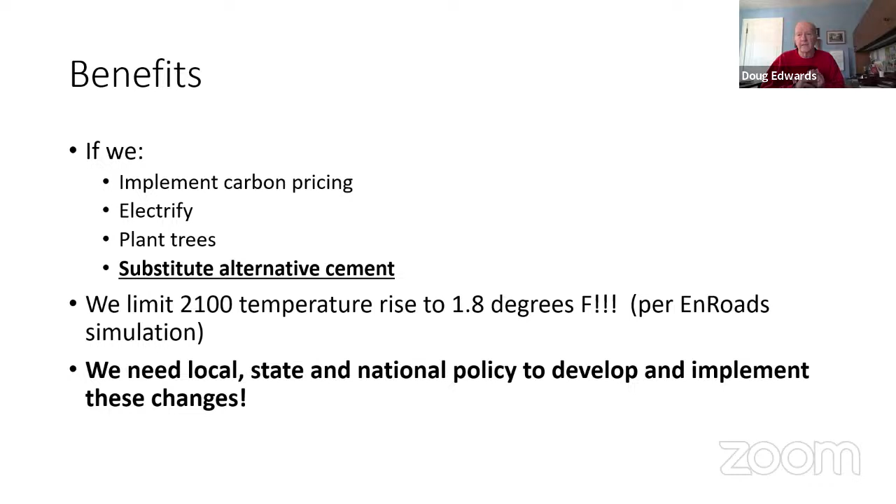And in order to do that, we need local, state, and national policy to develop and implement the changes. Okay? Local, state, and national. The national policy is necessary for the carbon pricing. Electrification is being done both locally and nationally right now with the IRA. The planting of trees can be locally and nationally. It turns out substituting alternative cement can be done locally and nationally. In fact, probably locally more likely.

So what can we all do? First of all, we all need to talk to people about the climate issue. It's always been told to me by people in this arena that the most important thing that any of us can do is to bring this subject up among people that we know, and next to communicate to members of Congress regularly. There's no reason why you can't shoot them an email. Give them a phone call occasionally, tell them that you're concerned about one thing or another.

Communicate with state and local elected officials, in particular with respect to these issues where local and state policy can move the needle, especially about electrification, permitting reform that accelerates grid transformation. Permitting reform will also accelerate cement alternative development. So this legislation and policy that has been implemented in both New York and New Jersey is now being considered in a number of other states around the US at the moment. And it's something that I'm learning more about right now.

Ask Congress to institute carbon pricing. Of all the things that I've mentioned today, the thing that actually moves the needle the most is carbon pricing. I will tell you that by far and away, carbon pricing makes the biggest difference. And actually implementing it affects carbon dioxide emissions around the world.